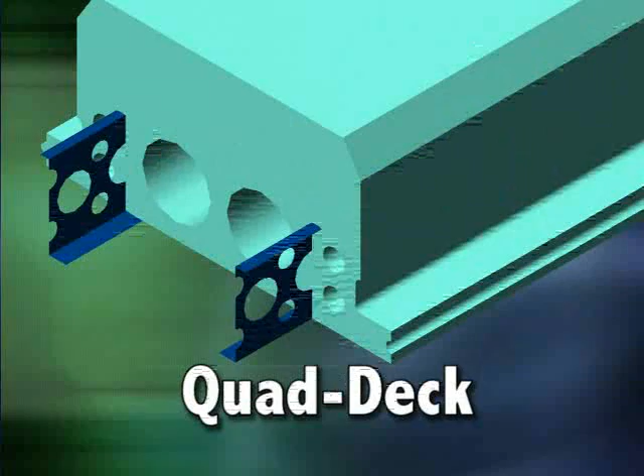The revolutionary Quad-Deck forming system is another high-quality, energy-efficient, insulating concrete form system. Quad-Deck is a pan-floor form designed for both commercial and residential construction. Quad-Deck panels shape a series of T-beams on 2-foot centers which integrate with a concrete slab.

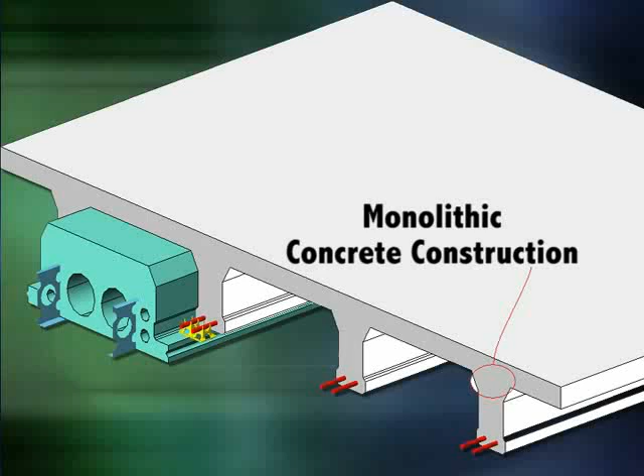The resulting monolithic concrete structure now provides two-way span capacity and a shear plane for superior structural performance. The panels interlock with a tongue-and-groove design at the base of a 5-inch wide cavity that forms the concrete T-beams. Quad-Deck comes in several sizes, creating concrete beams between 5 inches and 10.5 inches in height.

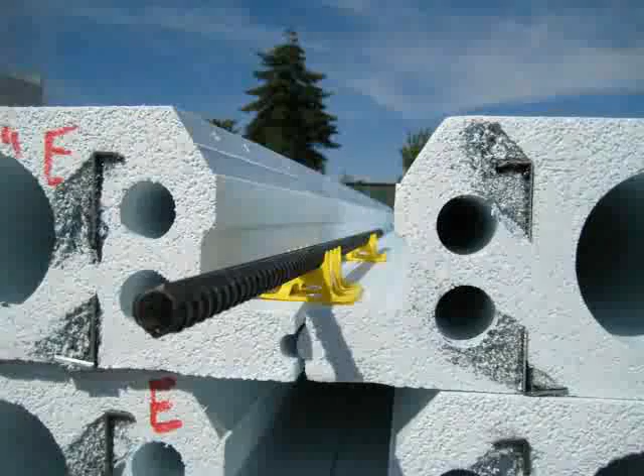Rebar is placed in each beam pocket, so the resulting T-beam functions like a conventional floor joist. The thickness of the Quad-Deck and the depth of the concrete slab will determine the overall beam height and thus the span capacity of the entire structure. Integral molded-in metal joists add strength to the panels, eliminating the need for secondary shore members, usually 4x4 wood beams and plywood decking.

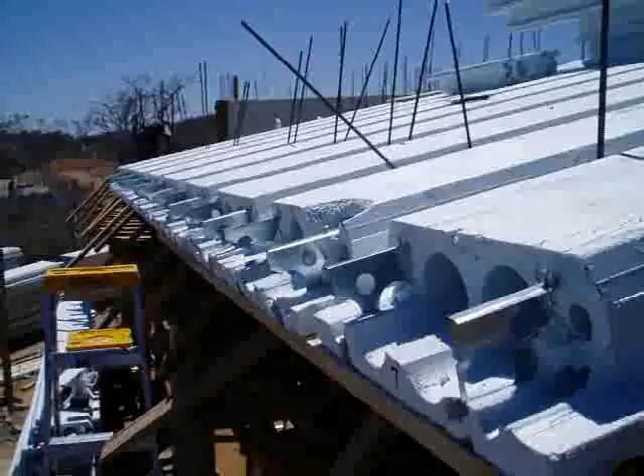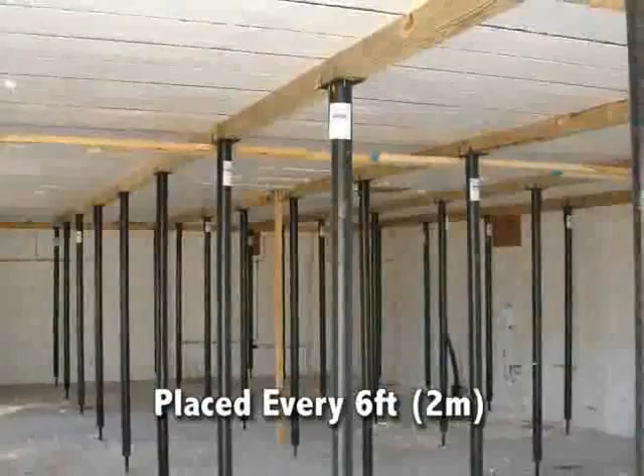Primary I-beam shores are placed approximately every 6 feet as called out by the project engineer. Even at a 6 to 8 foot spacing, Quad-Deck panels provide a safe and secure platform to support crews, reinforcement, and concrete. Quad-Lock recommends that an engineered shoring design be used in all cases and that removal of shoring be done only with permission from the structural engineer.

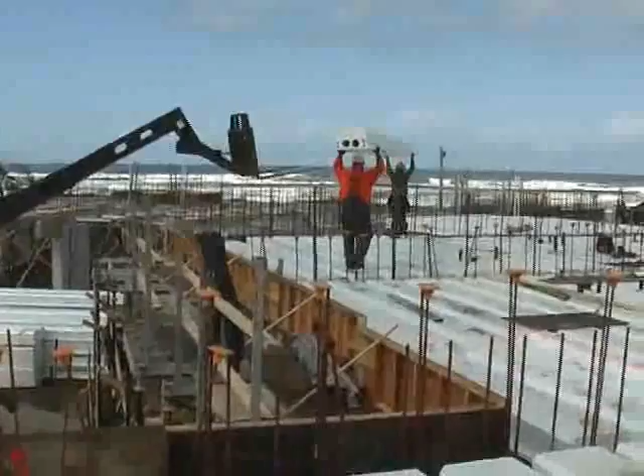Generally, sufficient concrete strength can be generated in 3 to 7 days, depending on the mix design and local weather conditions. The local ready-mix concrete supplier will design the right mix for the desired cure time. Once shoring is in place, Quad-Deck panels can be placed by hand in a fraction of the time required for conventional forms. Forms are laid over the top of shoring members to form a pan-form system of T-beams on 2-foot centers.

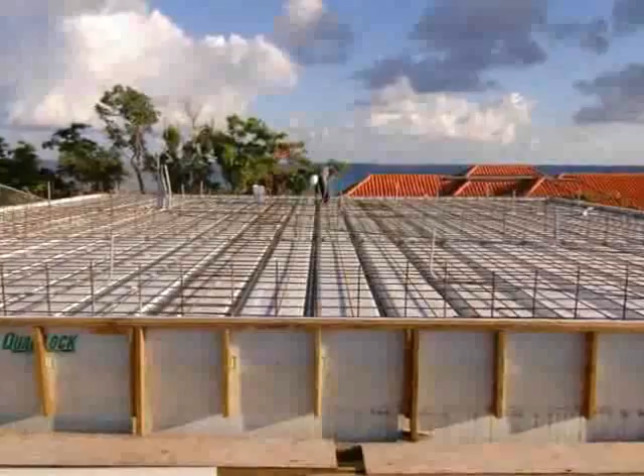Reinforcing steel, called out by the project engineer, is laid in the bottom of each T-beam to give the structure its span capacity. Reinforcing steel must also be tied into the supporting wall structure to provide a solid floor-to-wall connection. Consult the Quad-Lock product manual or website for different options on making this connection.

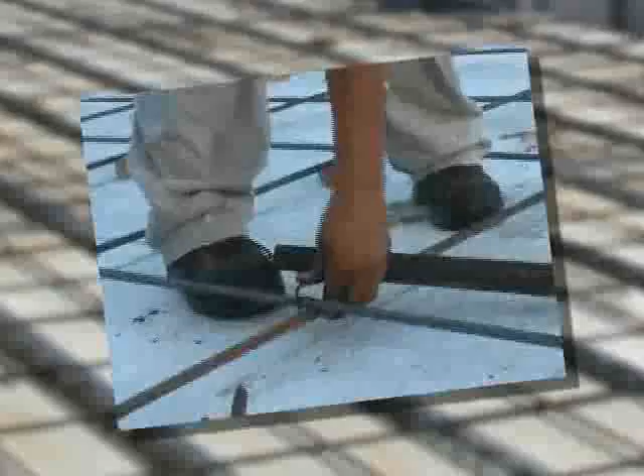Welded wire mesh or an additional rebar grid is laid on top of the Quad-Deck and reinforces the slab that is poured generally between 3 to 5 inches in depth. Quad-Deck T-beam structures can be designed using 40% less concrete than full-depth suspended slabs.

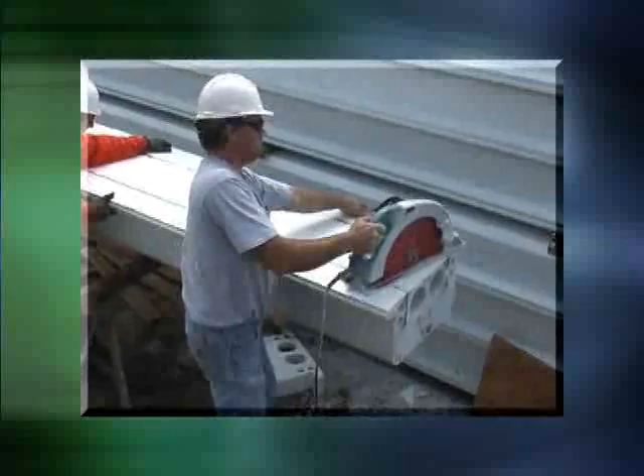In most cases, Quad-Deck is cut to length in the factory according to precise shop drawings taken from the building plans. This eliminates labor and waste at the job site. However, if necessary, field cuts are easily made using common construction equipment.

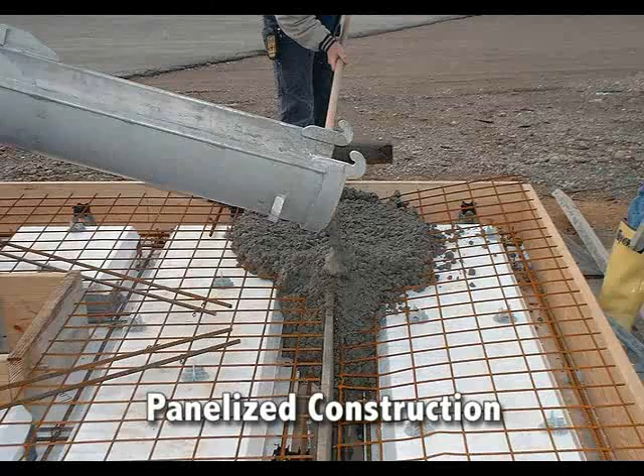Quad-Deck can be used in many applications like floors, flat roofs, low-pitch roofs, and even poured into wall panels on the ground and lifted into place for insulated tilt-up construction. Tilt-up panels can be formed without the traditional casting bed or bond breakers and consume less reinforcing bar than conventional tilt-up. Quad-Deck tilt-up panels are furred, insulated, and ready for finishes upon placement, cutting down installation time and material costs. Like all insulating concrete forms, Quad-Deck is both forming and insulation.

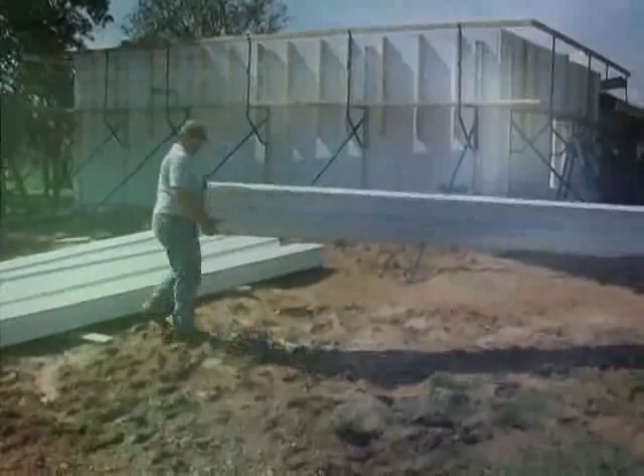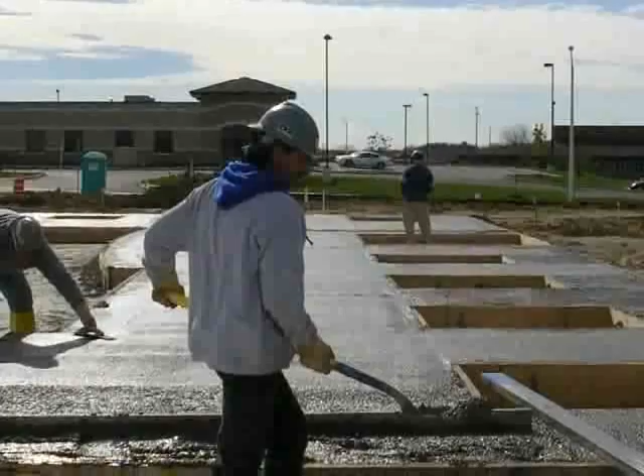R-values range from 16 to 34 depending on foam thickness, delivering the best combination of R-values and low air infiltration for energy efficiency. Architectural finishes can be applied on the ground, since Quad-Deck tilt panels are constructed face up using conventional slab finish techniques like exposed aggregates, stamping, staining, and cutting.

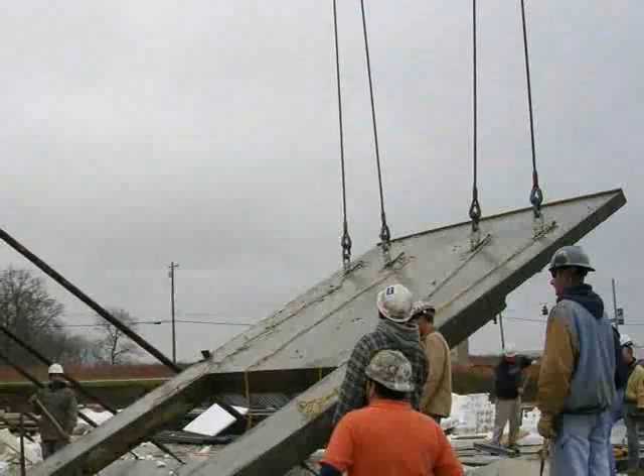Because floor, roof, and wall sections built with Quad-Deck require far less concrete, they reduce the weight of the structure by up to 40%. This means that smaller, less expensive lift equipment may be used in panelized construction, and supporting structures may be of smaller design for poured-in-place applications, which all translates into lower cost of installation.

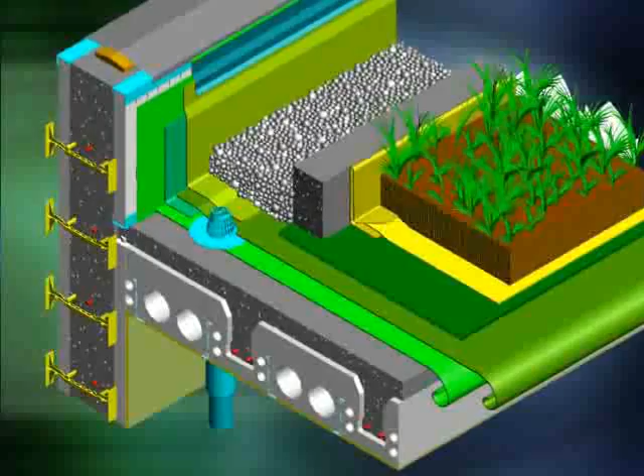Quad-Deck is the ideal product for the construction of green roof systems, with superior span and load-bearing capacity and the absence of any elements that are susceptible to damage from moisture. Please consult Quad-Lock Technical Services Department for proper layout and sizing, and always involve a local professional engineer.